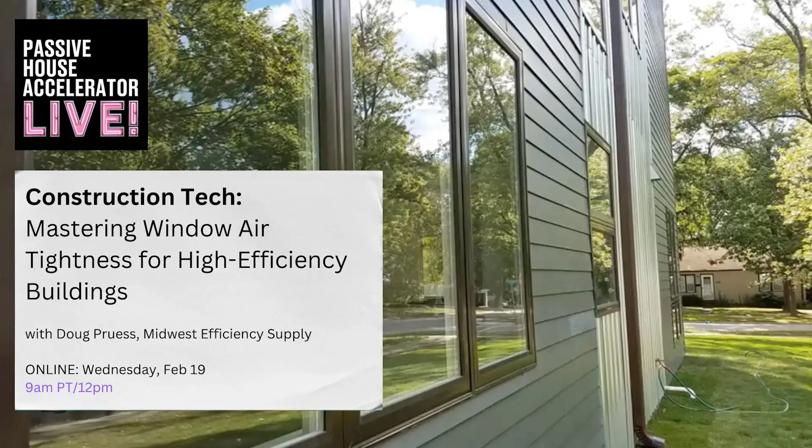So it's pretty cold here in Philadelphia right now. I think it feels like 15 degrees. And that's when you feel the weak spots in your house the most. So in my old 1870s house, it's definitely the windows, and actually mostly how the previous owner installed a few new windows about 20 years ago. So there's lots to learn for everyone, not just for passive houses.

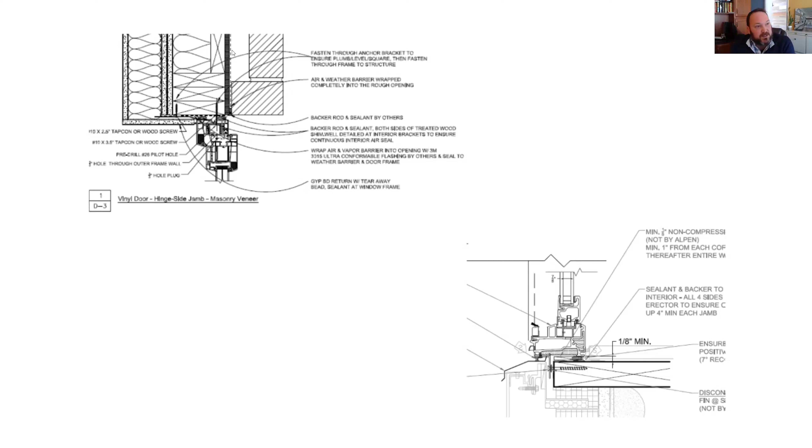Also kind of value engineering things of taking out certain products in openings and enlarging doors, or taking out.

So can you see my mouse? I'm not sure what you guys can see. Yes. All right, cool.

Sometimes simple, sometimes just stuff that, I mean, you guys as architects, you got to know a little bit and be dangerous about everything. And so sometimes things can be overlooked and not thought about. So kind of run this stuff through, say, your window manufacturer, your installer, your contractor, of stuff they've seen in the field too.

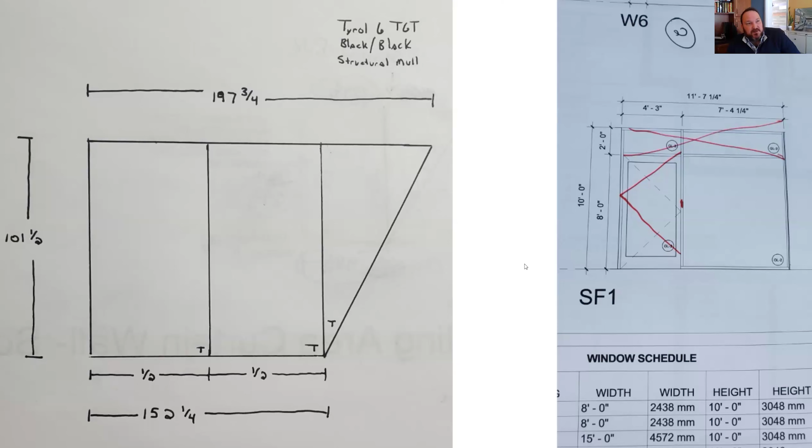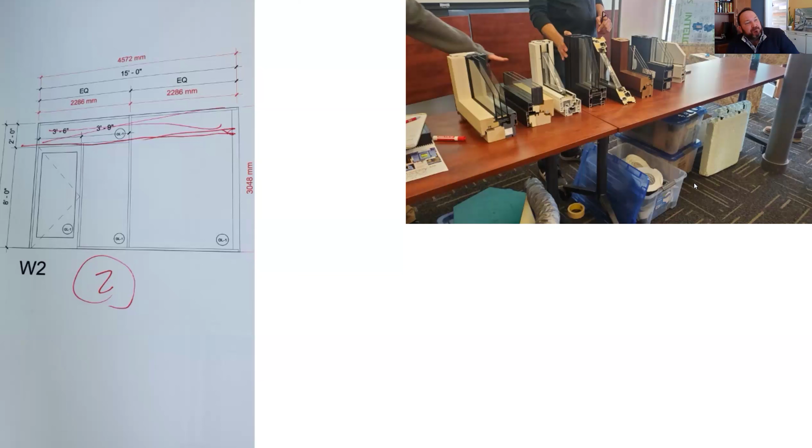Just kind of another view of different kind of window products, which I'm sure you guys have gone over before too. Let's see.

Here we're actually in a training with some European manufacturers that they did in Wisconsin, and we're basically making, I mean, not verified, but passive house windows from scratch, and just doing it woodworking, and then just applying triple pane glass and things like that.

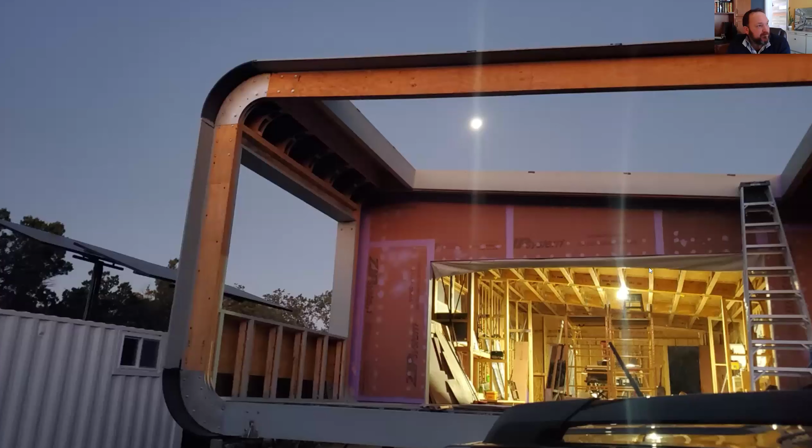This is a cool project for my buddy Andrew down south of San Antonio, where we ended up putting some triple pane windows in, and this is a weird situation.

Oh, one project to another, I guess. Sorry. Like I said, presentation was slapped together, so apologies.

So this one had LVL and structural beams, and we had to start considering the window install of how to integrate it. So I think I just popped that in there because of a cool photo.

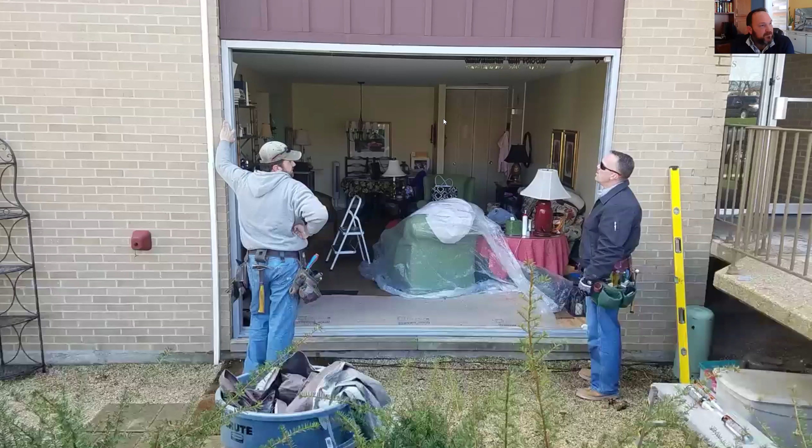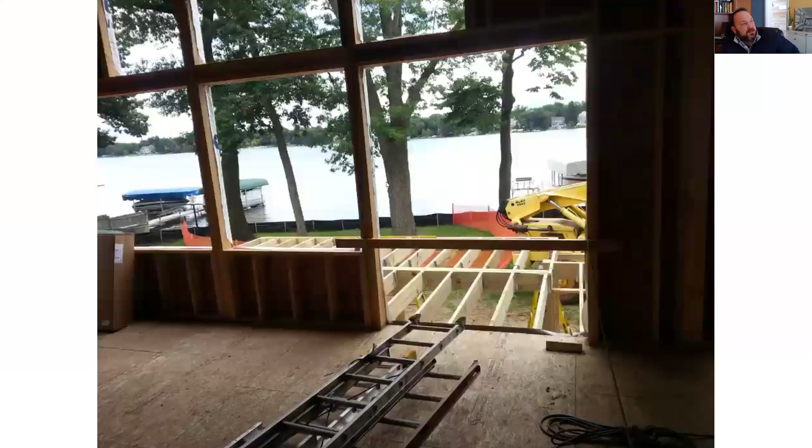Here we're putting in a fiberglass door, and I don't know if you see up here how once it's put in, you kind of see the deflection on the head. Also you kind of see over time how the sill here is sloping down on the corners. So these are kind of things where you want to pay attention ahead of time during measure, and not just assume things are the correct sizing. Let's see here.

Square, plumb, and level, and then also we're looking at what we can do for installation techniques. There's going to be strap install, there's going to be nail fin, there's different variations where you can use, let's say, angled pieces and move windows up and down, side to side.

So this was kind of a fun project we did with the Taylorville High School and Matt, teaching the kids high efficiency installation techniques along with their pretty high efficiency building. If you guys ever run into these projects with these high school kids, it's just fun to be around and actually sit and talk with them about different types of jobs that are available, and just the interest that you get to see, and seeing them hands-on in these.

So here Matt did a good job where they're actually sloping these sills. A lot of times the slope sill gets value engineered out. Also, I'm a big fan because it makes your life easier for wrapping the air barrier to the inside by wrapping this flashing all the way up and around the jambs and basically creating continuous. So that gives you an option of bringing that air barrier to the inside.

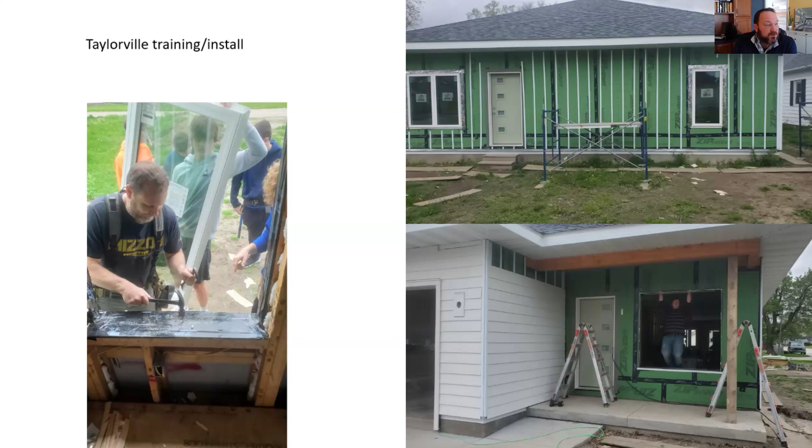So this is stuff that we can do on everyday buildings where just something as simple as an extra step can lead to a lot better of an installation and a lot better airtightness on our transitions, which we know can be a huge problem when we start depressurizing.

Being a service tech and working on other projects, we actually get to be involved in some really cool things. This is a project outside of Peoria. This is a National Guard base. I can't show a ton of the photos, but these are the ones that we can. This is essentially where this building was monitored for over a year.

And then what we did was we put in some high efficiency inserts to the inside because it was just cost prohibitive to basically take windows out of this large building and take a building out of commission. So what's nice about inserts like this, this is a fiberglass frame, and these are bulb seals, and we're just basically sending it into the opening, and it gets slid into these angle strips, which get embedded into the top of the sash.

So once they are in, this essentially acts like a quad pane. When we're talking with the people in these offices while they're working, they're saying sometimes in the summer, these buildings, even with the AC going 24/7, get up to about 87, 89 degrees. So nobody really even works in these areas. They go down in the basement.

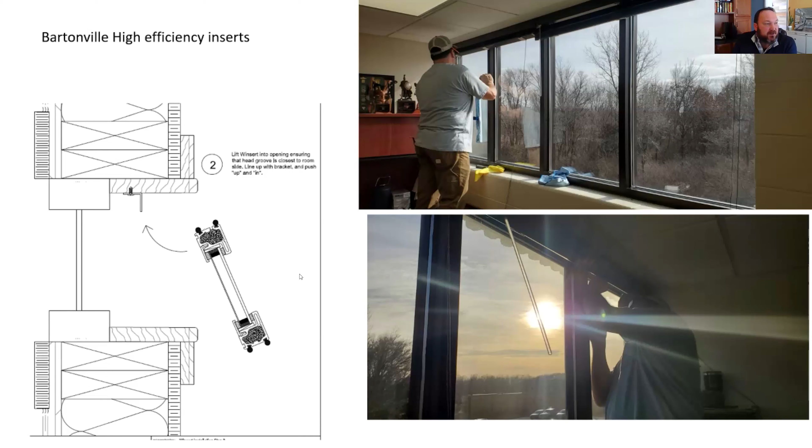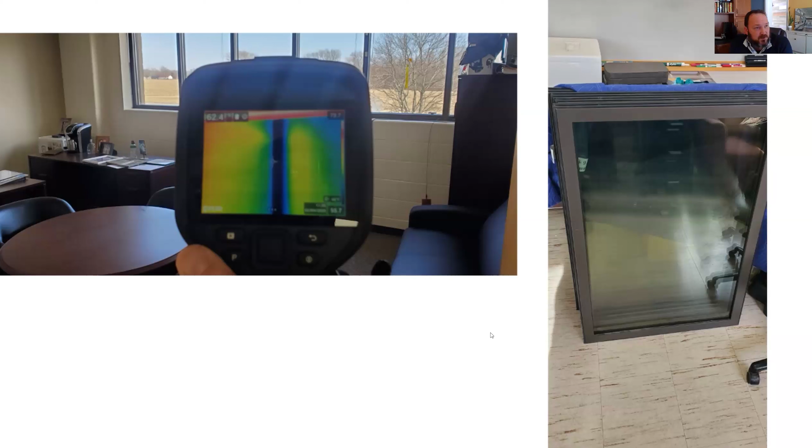I guess a blurry photo of an IR again, so apologies for some of this, but this just kind of shows on a cold day where you're actually getting a lot better performance, where you can actually see these fiberglass frames and slide in. These aren't necessarily for air infiltration. This is more for thermal and radiation.

When you are designing in really big openings, doors, windows, things like that, I would kind of say keep in mind how you're going to get them there. We can make these cool openings on paper and they can be done, but something as simple as a service, this is in like an Indiana Dunes area, where there's this lift and slide door where the glass blew. So it was a huge endeavor getting this panel up and over a garage. How to even get it there. We had to rig something up in a truck. So something to keep in mind.

Not all products are going to have a failure, but there is a failure rate, which traditionally in the industry is about, I'd say, 0.5% of glass packages for every manufacturer are going to be compromised at one point. So kind of keep that stuff in mind of serviceability.

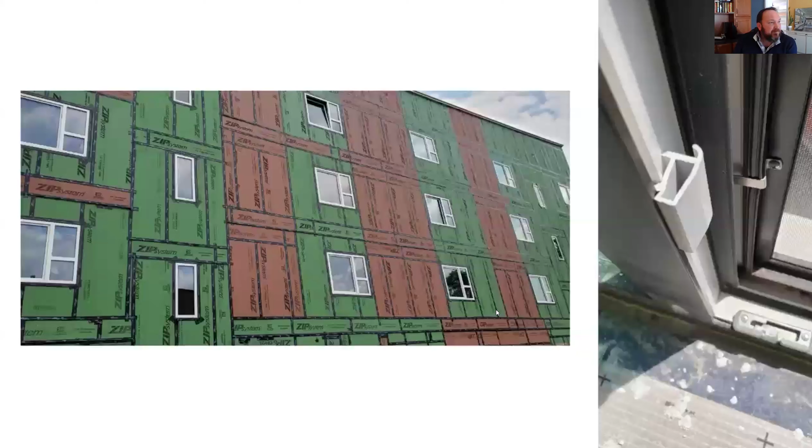Certain different projects, some are simple, just walking through a multifamily, and the product worked well, but the owner of the building started going through and started realizing that some of the windows, they just couldn't open. And so on a service call, bringing a crew out, walking through every single thing, we start noticing that every single shipping block was left in the openings.

So essentially, it's communication. It's communication with installers, it's communication with the manufacturer even. Just a quick walkthrough of certain things where we can prevent a lot of services. So this building was well done. Just one simple thing can make things inoperable.

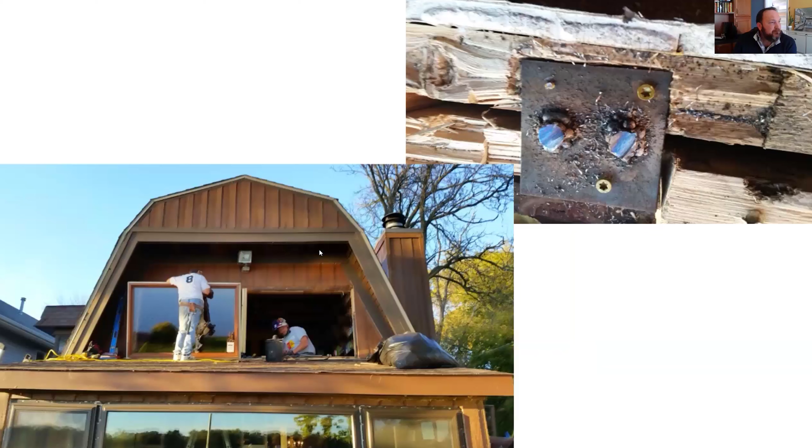Also pay attention to weird structures. I would never have said when we're installing windows that I need to know how to weld. Well, we had to weld this one because there was a structural piece in between where it had to be figured out, and basically talking with a structural engineer. This was kind of one of those situations where you just make do with what you have, and yeah, that was something we were just kind of thrown into and never expected to have a welder in there.

Down in St. Louis is a really cool house. What I liked about this one was there's a lot of cool features. So let's just say this walkway right here. This was all quad pane glass. The reason I was there was because we had some quad pane glass that got broken in shipping, and I actually think there was a seal that was broken too.

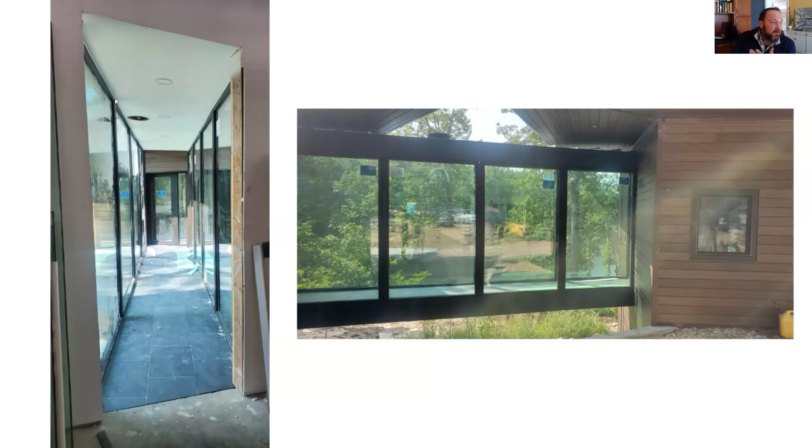So this is just kind of eye candy, but also realize there's a lot of heavy things, and even in a design phase, there were conversations about some of this drywall coming down into this area, which would be blocking what's called a glazing bead, which allows us to reglaze the glass. So think about serviceability while you're designing.

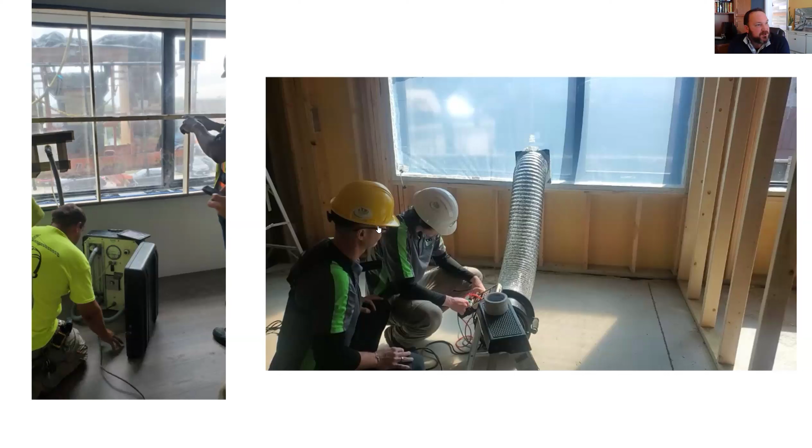Doing air testing on projects. Speaking of Joe Konopacki right there. This is water tests and air tests. So this was just kind of an initial smoke test that we're doing before the project got too far.

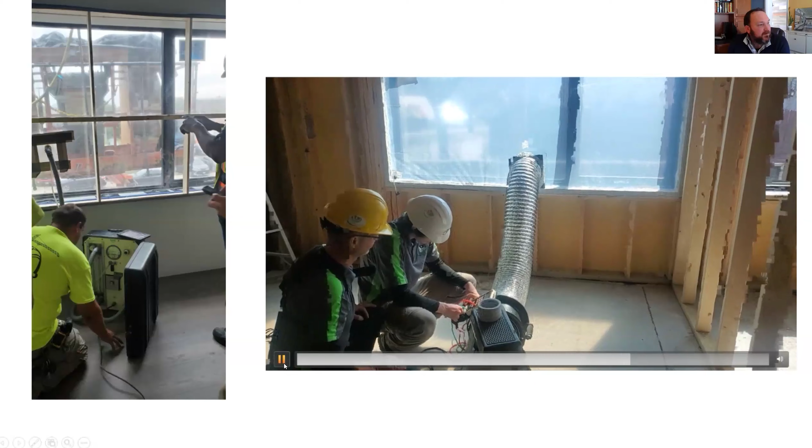All right. So the reason I'm showing you this photo is it's a cool design. It's a high efficiency multifamily. It's actually a passive house project, and this design makes a lot of sense, except what we start noticing is you can start getting some water infiltration in this kind of design. This is where you're getting the window actually flush to the WRB, and there is no overlapping tape or anything of the sort. Also, what we saw in this design was there was nothing spec'd in the RO, and there was a weep system here.

So they value engineered out a slope sill, and then the whole rough opening didn't have anything inside. So essentially you're sealing the outside, you're sealing the inside. What that allowed was what I call a crosstalk across the whole project, where if there was an interior hole or something along those lines, it allowed just a direct path. So something as simple as filling that cavity with something, or preventing that crosstalk in a different way.

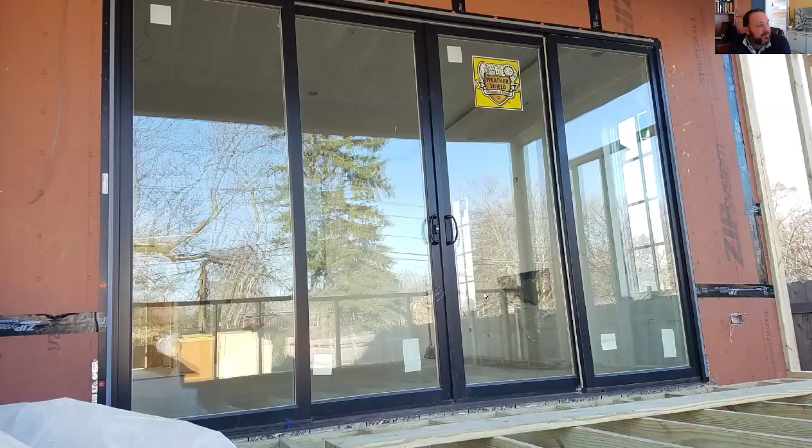Spray foam is fine around these areas. I look at it more as an insulator. I am not a fan of using spray foam as your air barrier, though. Just certain products during an initial install. Yeah. Here's a high efficiency cellular composite. There's a lot of different products out there.

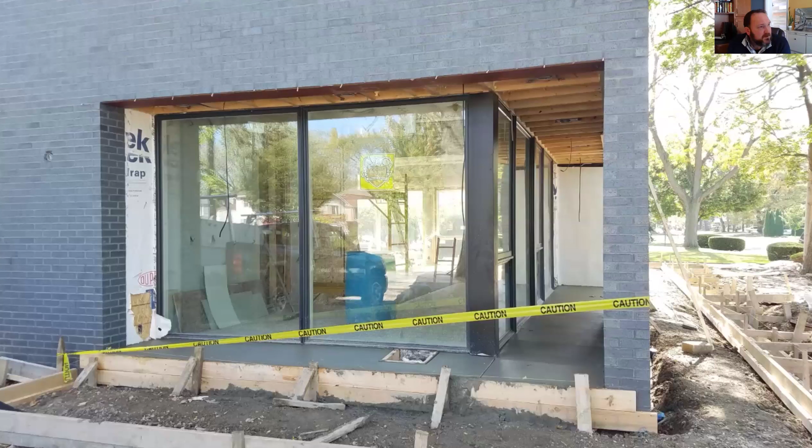Let's see. Yep, this is another Weather Shield one where you had to put into play just laying concrete up against the window. You always want to make sure you put some kind of buffer in there also, because they started having service issues because of expansion, contraction of concrete, things like that.

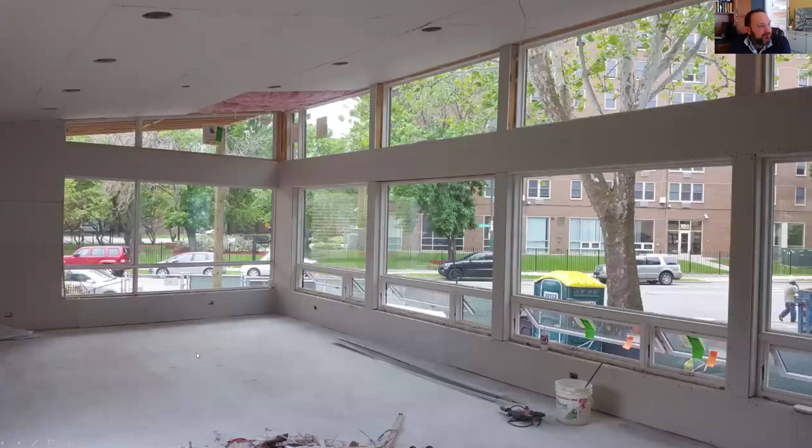All right, so this is a cool project. I don't know if you can see me, but that's the completion of it back here. It was in a few magazines. It was really cool, essentially a lot of glass. So when you're looking at projects, sometimes it's as simple as asking the question of, what different glass packages can I have to affect this certain building?

And by that I mean something as simple as a room side low E made this project efficient enough, because there's so much glass, that they're able to downsize their HVAC. So I show this because I like this project. I like the way it looked, how it was installed, but also the design can meet thermal efficiency, just by looking at different glass packages going from high efficiency to not.

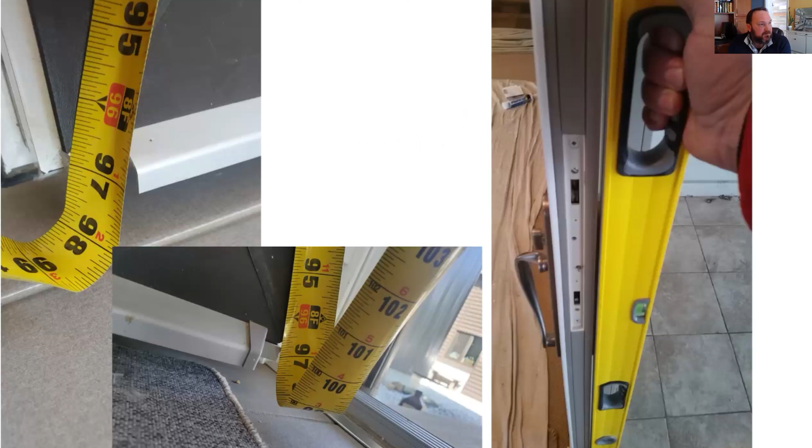Yeah, so here we're just kind of measuring doors and windows. Sorry, a lot of these things are just kind of bumping through. You can see curved doors and sashes, things like that. Some of them are a simple fix. A lot of times something like this that we see in the field, let's say a curved sash on a sliding door panel. Kind of a funny story where we had one that was curved like a banana, and we ordered a new panel for the homeowner. And by the time it got there and we put in the new panel, it had the same deflection.

So what we noticed was, in the meantime, between getting the new panel, closing and locking the old panel basically married itself to the frame while we were waiting. So sometimes we just got to let products do their thing. We see this a lot with weather stripping, where a door or a window is very hard to operate. That's just because the weather stripping comes off of a roll in the factory. It's put in, and by the time it works itself, it actually works the way it's supposed to.

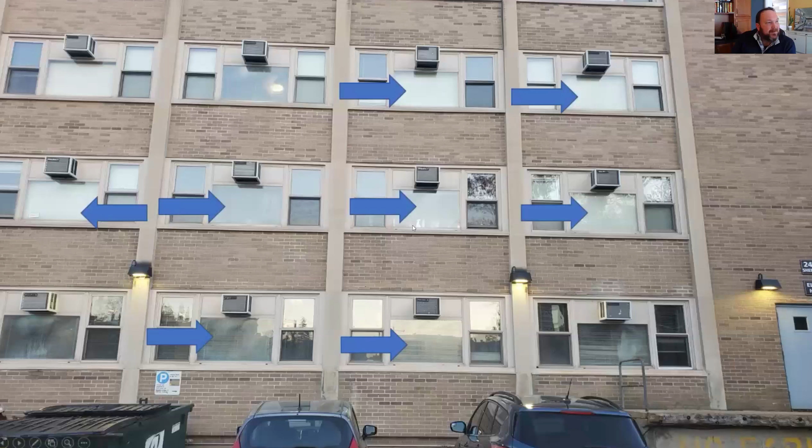Here is something, I was actually walking from an Iowa Northwestern football game, and we're walking by a multifamily here, and I just noticed the design of this. What I like to bring out is all of these units are blown. So you went from maybe R2.5 to basically just somewhat of an air barrier. And it's all because of the design of putting an air conditioner right above, and it sits and vibrates on this glass the whole time. So that 0.5% glass failure rate doesn't really apply here, because your AC is vibrating this glass to the point of failure. So different designs. I'm going to guess this is a retrofit situation, but maybe not.

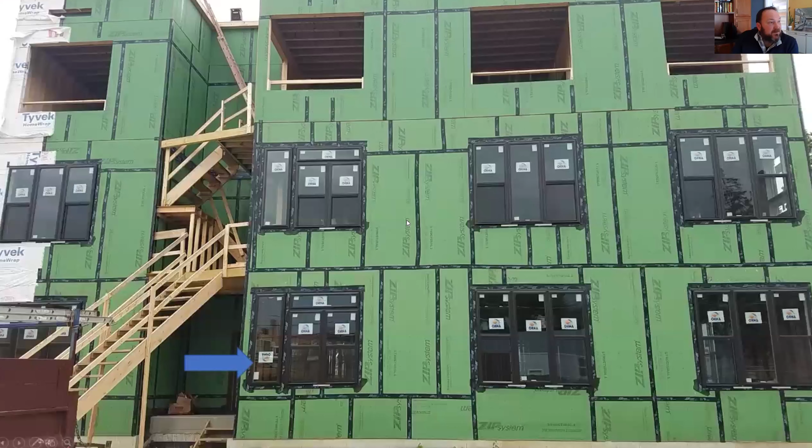So what do you see in this photo? What I see is doing a decent job. There is some overlap on some of the flashing here. It's proper flashing technique. But you can even just walk around and see something simple like, hey, look, this sticker right here. If you actually zoom in and get close to it, what I noticed were the weeps are on the top. So what happened here is these guys were moving quick in a multifamily, and they took a picture window and flipped it around.

Sometimes stickers get moved. That's fine. But this is going to be the first initial thing I'm looking at, I'm at least going to give it a look. And luckily we did, because the weeps were on the top. This is a situation where water could have flowed into the top through the window system and started flooding out. So again, just something as simple as a sticker, or looking for a shipping block, talking with a manufacturer, just taking that quick time to make sure everything works properly.

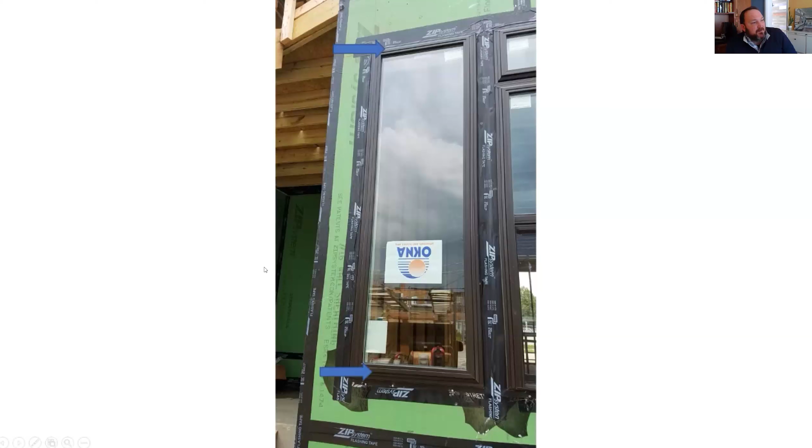So there you go for kind of my quick rant. I talk with a lot of installers, and a lot of times they're just your framers. And I would say that's fine. That's great. No big deal. Maybe get the manufacturer involved before something's installed, because a lot of these guys are looking to further their careers like everybody else. And they'll ask, hey, what can you do to get more projects or do a better job? Or how do we do some of this kind of training and stuff that you guys are doing?

And I'm starting to tell people, if you want to be treated like a doctor or an architect, start acting like it. Why don't you just go get some trainings and start realizing that, instead of just pulling people off the streets to install windows, which are part of the interior, the exterior, the heating, the lighting, the cooling. It's almost a focal point, a piece of furniture in some rooms. And if you think about HVAC, you have to go to college for that.

And this is something where you see windows get value engineered out of a project where a certain percentage of the house is glass. And if we spend all this time saying, hey, we're going to get these high efficiency, or we're going to get a Wolf stove and all that kind of thing, which are great, just don't take that budget part out of your windows, because eventually it's going to catch up with you.